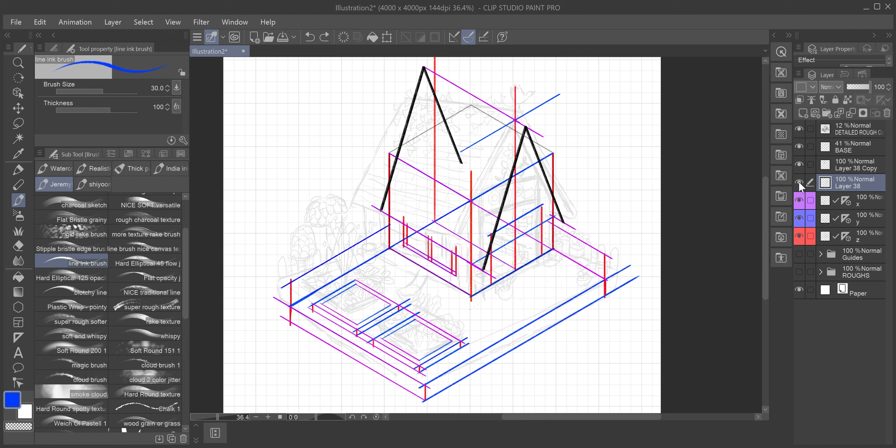With the brush tool, I then outlined in black on a new layer all the important visible lines of my drawing. I used the function Shift, Hold, then Let Go to make straight lines with the pen tool.

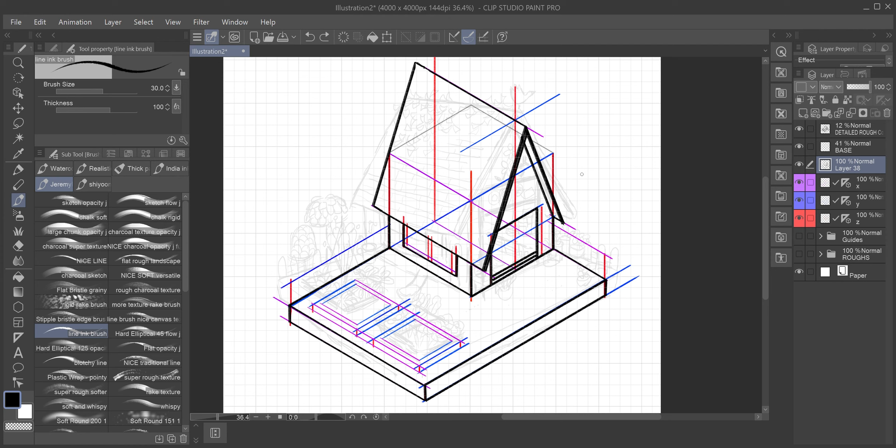And there you go! Following these steps, you should have the structure of your isometric drawing set and ready to go for the next step: painting. As you can see, the structure of my drawing doesn't include any detail. I kept the details on a rough layer to use as reference while I paint.

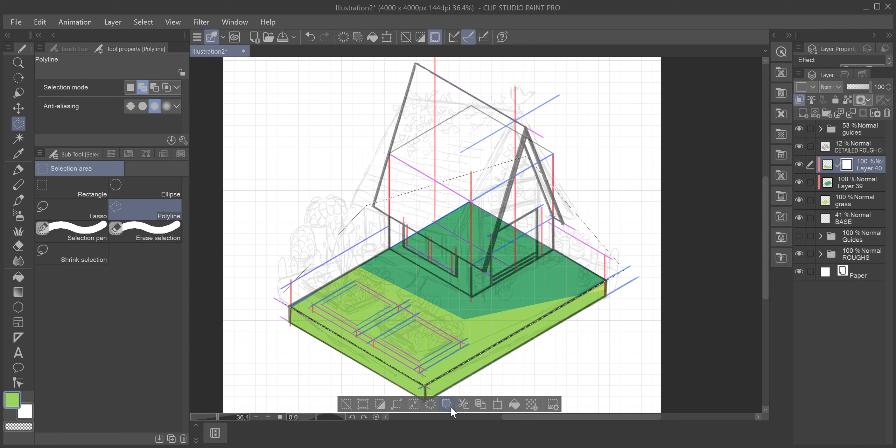We can finally move on to the last step, making the final painting and putting in the colors. I think painting lineless fits the aesthetic of an isometric drawing very nicely, as well as using geometric shapes, which is why I decided to take this approach.

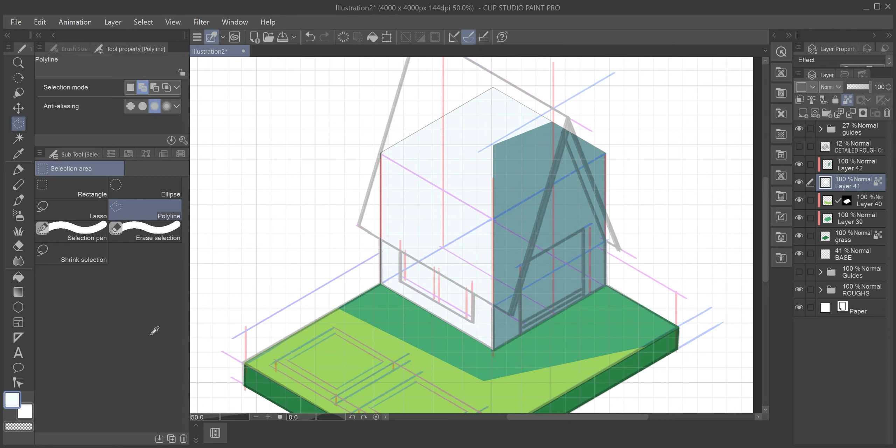My coloring process is very straightforward, and you can apply it to any type of painting you want. The tools I use are the following. The Polyline Selection tool, found in the tool menu under Selection Area, Polyline. It is a very versatile tool and allows you to correct your mistakes so easily. It is so much better than in any other software I've used so far.

Then I have the Bucket tool, found in the menu. Its shortcut is G, but I like to use the shortcut Alt-Delete. It does the same thing, but I find it to be a bit cleaner.

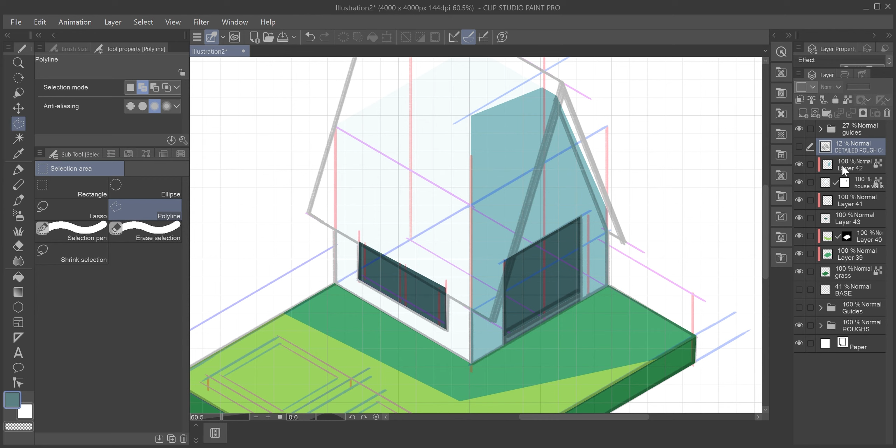Then I find the Clip to the Layer Below tool very, very useful. It is found above the layer menu. And finally, I also use the Lock Transparent Pixel tool.

Another tool that I use a lot is the brush tool, the very famous brush tool that I use for applying textures.

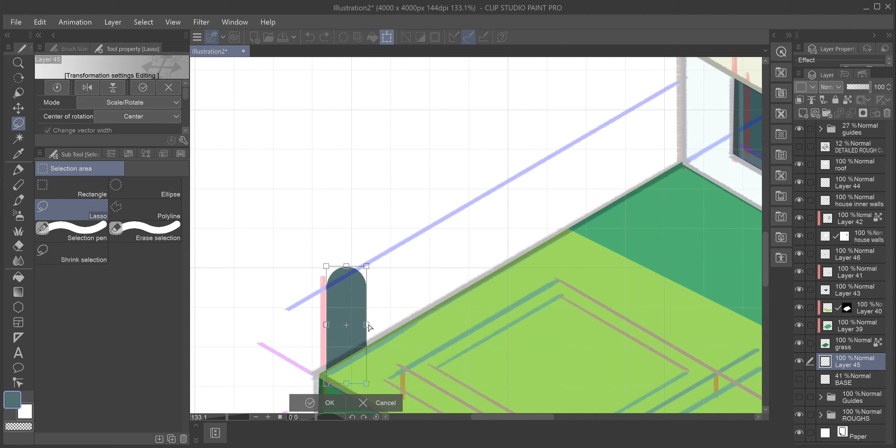So the first step for coloring is to block all the main colors for all the main shapes, each in a different layer. Set the opacity of the structure layer very low. You want it to be there for reference, but you don't want it to be overwhelming.

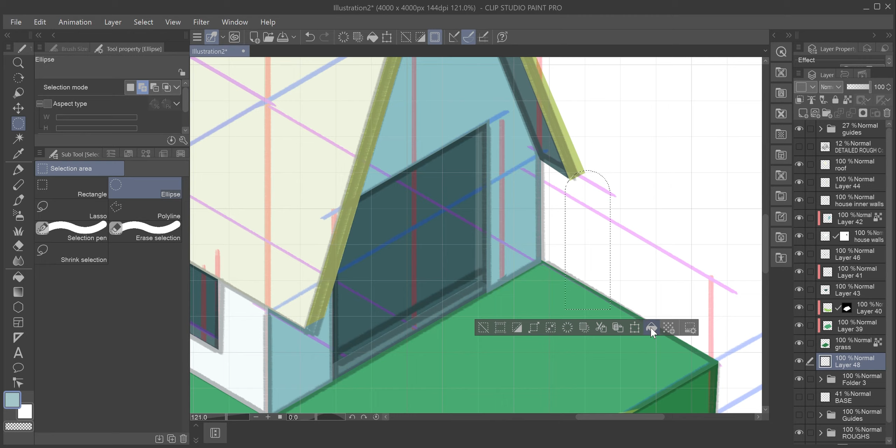Start by creating a new layer and naming it according to the object you're painting. I find it very helpful to name layers as I work, or else it gets really confusing because I like to work with a lot of different layers.

So it's very essential. Then, using the Polyline tool, select the outline of the object that you're painting. If you want to go for a less geometrical look and a more curved look, you don't have to use the Polyline tool, you can use the Lasso tool or any other selection tool, up to you.

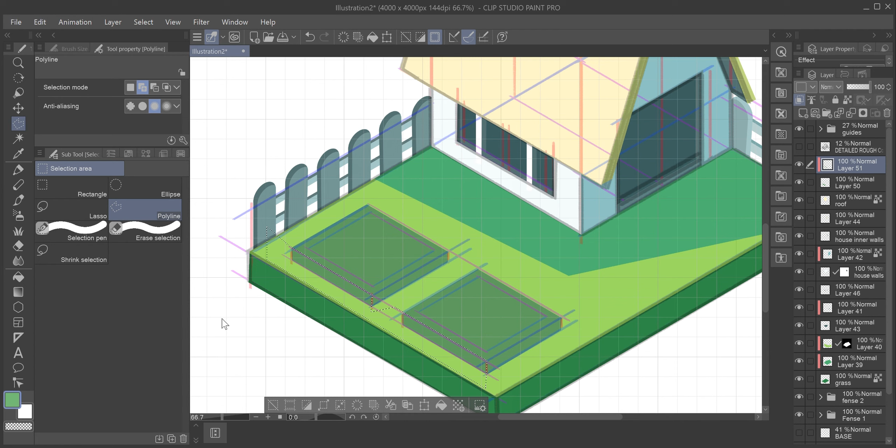Once your shape is selected, go to the color wheel and choose the color that you want it to be. Keep in mind that you can change that very easily later. And then once you are happy with that color, just press Alt Delete or the bucket tool. It's up to you.

If you're not happy with how the color looks, just select another color and press Alt Delete again. And there you have it, your first shape. Now you can do the same thing for each of your shapes.

For overlapping shapes, instead of precisely selecting around the previous shape, a way to save a lot of time is to use the Clip to Layer Below tool. As you can see, I use it quite often.

Another tip to change color very fast is to select a shape, for example, the grass or the roof or even the walls, and then pressing the key Lock Transparent Pixel, which is found right on top of the layer menu, and then use the shortcut Alt Delete to switch the color. And this way you can just decide to recolor the whole painting in a matter of minutes.

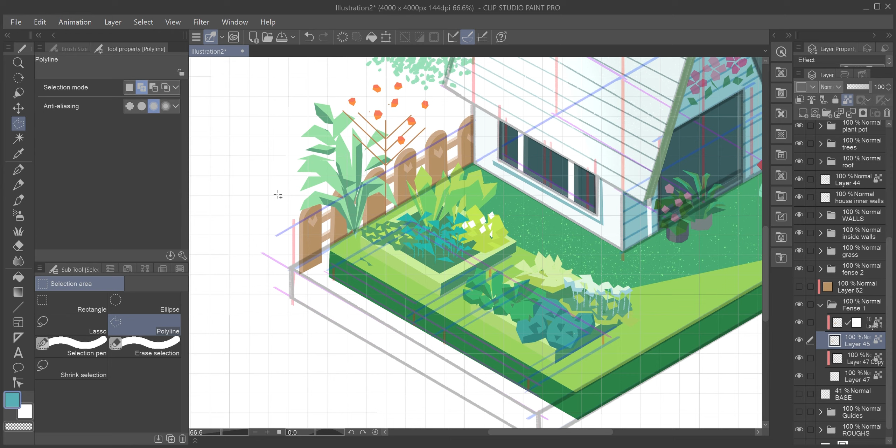I found out that you can use brushes from Photoshop as well and import them directly into Clip Studio Paint, which is very handy. I spent a lot of time playing around with brushes, especially in this piece because I was trying to get different textures for the different plants. So it's worth playing around.

Another thing you can try and experiment with is applying different modes to your layers. I like to use the multiply filter, the add glow one, and the overlay one. They're great for adding light effect or shadow effects.